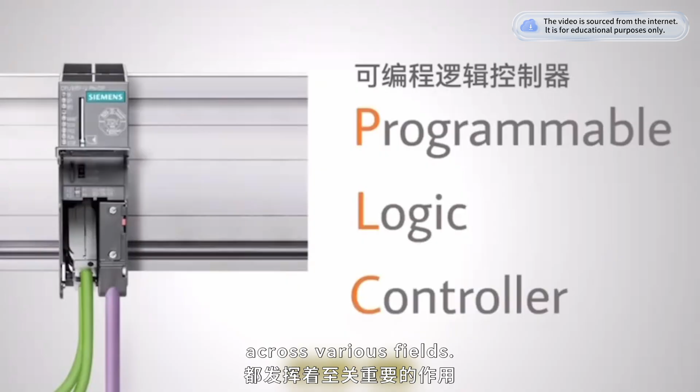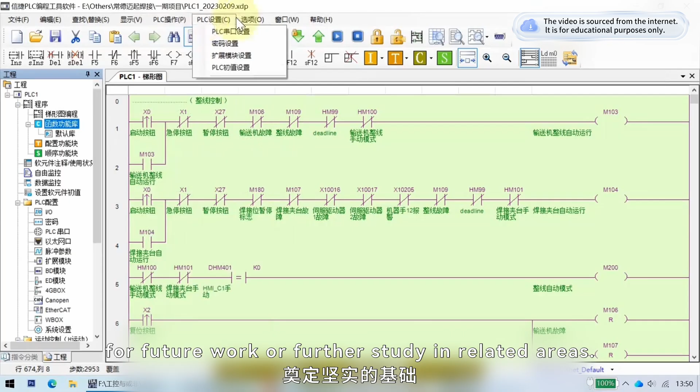With the development of industrial automation, PLCs have been playing a crucial role across various fields. The S7-200 Smart we are using is a powerful and widely applied programmable logic controller. By learning to program it, we can gain a better grasp of core industrial control technologies, laying a solid foundation for future work or further study in related areas.

We will explore this topic from the following parts. One, installation of PLC programming software.

To install the PLC programming software, we must first complete the hardware connection. A PC PPI cable is required to establish communication between the personal computer (PC) and the PLC. Connect one end of the cable to the PC's interface and the other end to the corresponding port on the PLC. Before installing the software, close all running applications on the computer, including the Microsoft Office toolbar, to prevent software conflicts or installation failure. Also, ensure that the communications cable between the PC and the CPU is properly connected.

Next, double-click the Step 7 Installation Program Setup.exe, and the system will automatically launch the installation wizard. Follow the wizard step by step to complete the software installation process. We can choose the default subdirectory as the installation path, or click the Browse button to select or create a new subdirectory in the pop-up dialog box based on our needs.

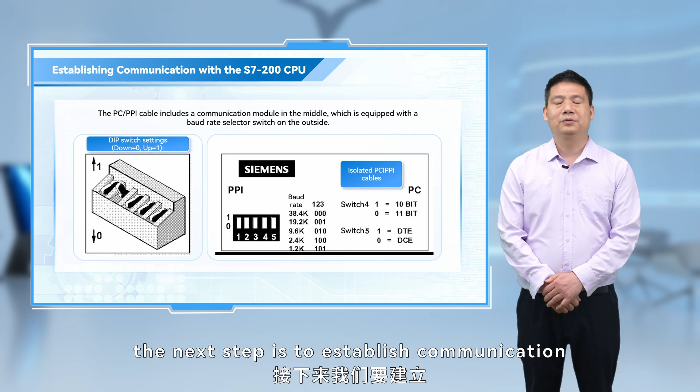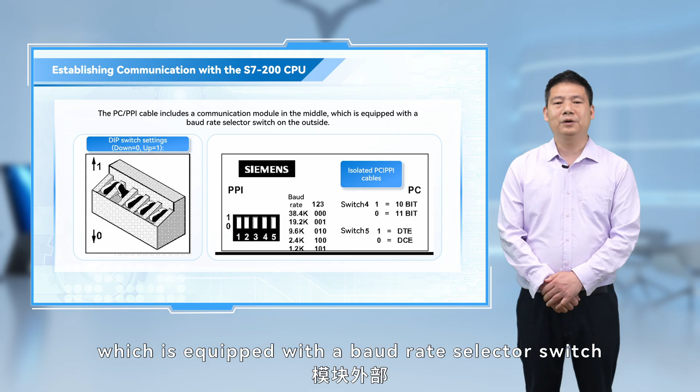After we install the software, the next step is to establish communication with the S7200 CPU. The PC PPI cable includes a communication module in the middle, which is equipped with a baud rate selector switch on the outside. This switch provides 5 PPI-compliant baud rate options: 1.2 kilobits, 2.4 kilobits, 9.6 kilobits, 19.2 kilobits, and 38.4 kilobits. The system default value is 9.6 kilobits per second.

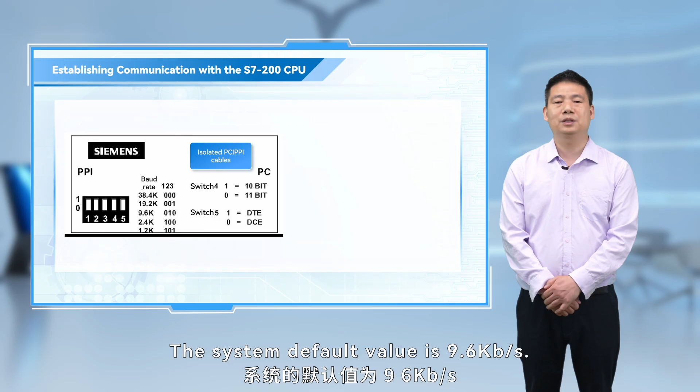The baud rate selector switch (DIP switch) on the PC PPI cable must match the communication baud rate configured in the software system. There are 5 switch positions on the DIP switch. Switches 1, 2, and 3 are used to set the baud rate, while switches 4 and 5 are for setting the communication mode. For the default communication speed of 9,600 bits per second, switches 1, 2, and 3 should be set to 010. If a modem is not being used, both switches 4 and 5 should be set to 0.

3. Components of the PLC programming software window.

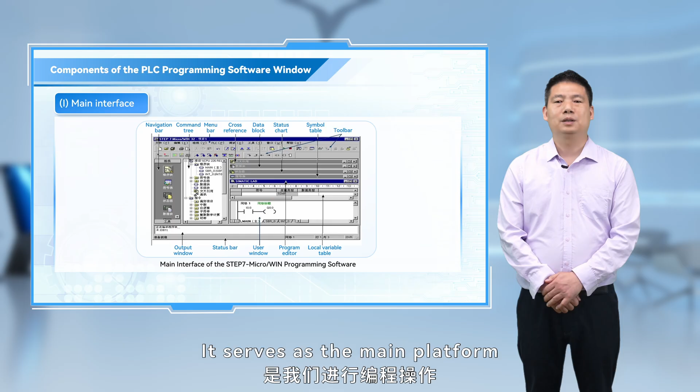Next, let's get familiar with the components of the PLC programming software window. First, the main interface: upon launching Step 7 Micro/WIN, the first thing we see is the main interface. This interface includes various menus, toolbars, and a workspace area. It serves as the main platform for programming operations.

2. Main menu. 1. File. This menu includes commands such as New, Open, Close, Save, Save As, Import, Export, Upload, Download, Page Setup, Print, Preview, and Exit.

2. Edit. The Edit menu contains options like Undo, Cut, Copy, Paste, Select All, Insert, Delete, Find and Replace, and Go To.

3. View. This menu allows us to customize the development environment of the programming software. For example, we can open or close auxiliary windows like the guide window and the command toolbar buttons to suit our preferences. It also allows us to perform all operations in the guide window, choose different program editors (LAD, STL, or FBD), and set editor styles such as fonts and command box sizes.

In addition, the symbol table view menu can be used to configure parameters such as data block, system block, status chart, cross-reference, and communications. We can also choose whether to display comments, network comments, the navigation bar, command tree, and output window.

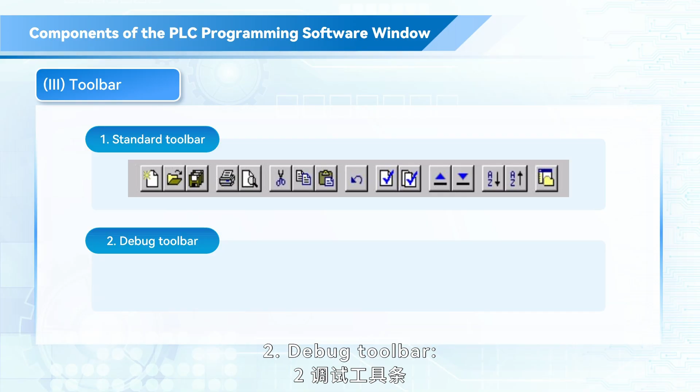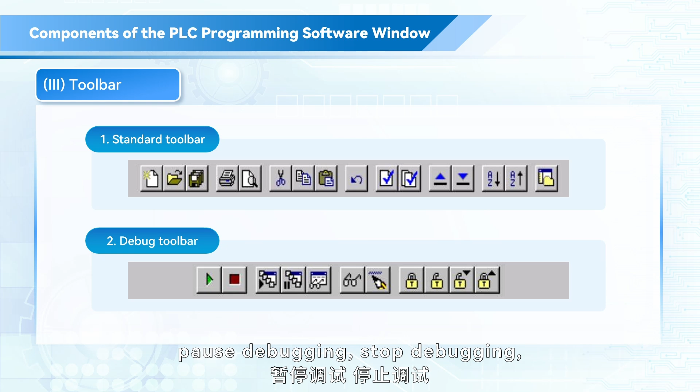Debug toolbar. The debug toolbar is specifically used during program debugging. It includes buttons such as Start Debugging, Pause Debugging, Stop Debugging, Step Execution, and View Variables.

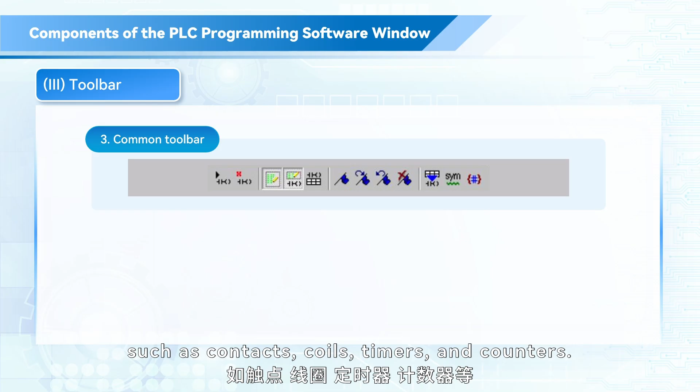Common toolbar. The Common toolbar provides access to frequently used programming tools and commands, such as contacts, coils, timers, and counters. LAD command toolbar.

LAD stands for Ladder Diagram Programming Language. The LAD command toolbar includes buttons for various ladder diagram commands, such as normally open contacts, normally closed contacts, coils, timers, counters, and comparison commands.

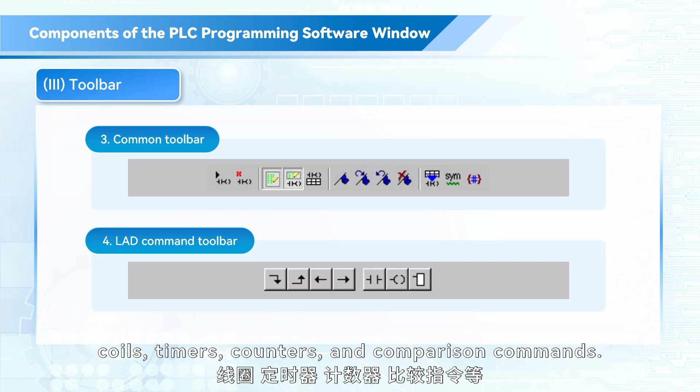Navigation bar. The navigation bar is an important tool that helps manage and navigate the project. It consists of the following main sections.

Program block. It consists of the executable program code and comments, including the main program OB1, optional subprograms SBR0, and interrupt routines INT0. We can create or modify the program block and write our own program code by using the New or Open commands from the File menu.

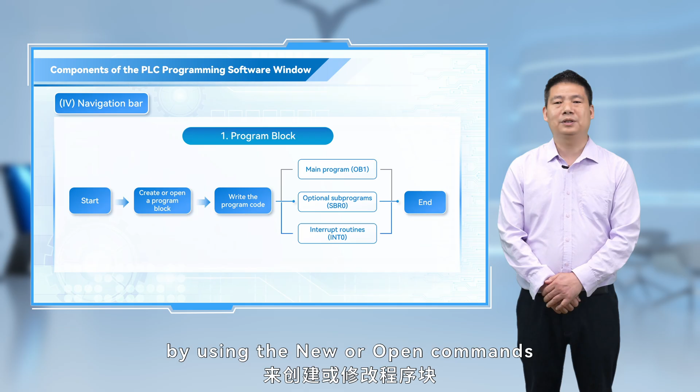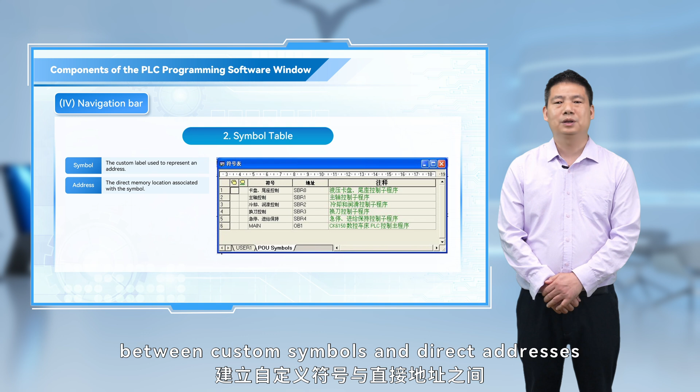Symbol table. It is a highly useful tool that allows us to use symbols in place of direct addresses for programming. By establishing a mapping between custom symbols and direct addresses in the symbol table, along with associated comments, we can use more meaningful symbols for programming elements.

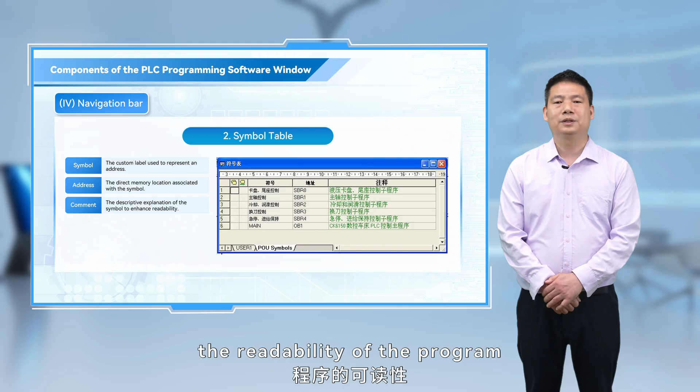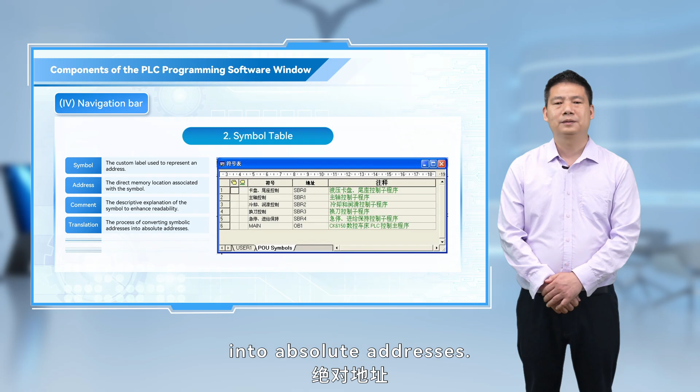This not only enhances the readability of the program and makes it easier to understand and maintain, but also ensures that once the program is compiled and downloaded to the programmable controller, all symbolic addresses are automatically converted into absolute addresses. The information in the symbol table will not be downloaded to the controller and does not occupy the controller's memory space.

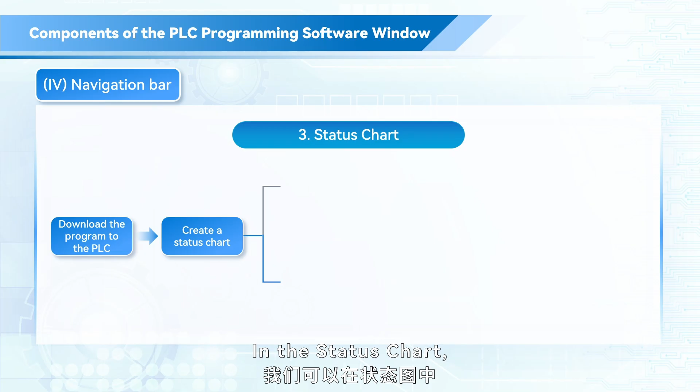Status chart. After downloading the program to the PLC, we can use the status chart to monitor the program's execution. In the status chart, we can add variable addresses and specify their data formats. This allows us to observe the real-time values and states of these variables during online debugging.

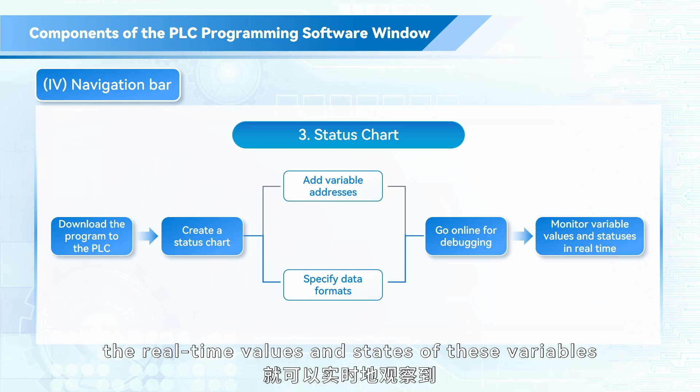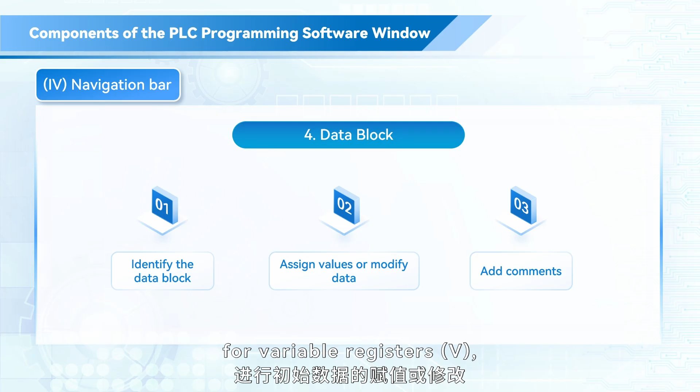Data block. It is mainly used to assign or modify initial values for variable registers, and we can also add explanatory comments as needed.

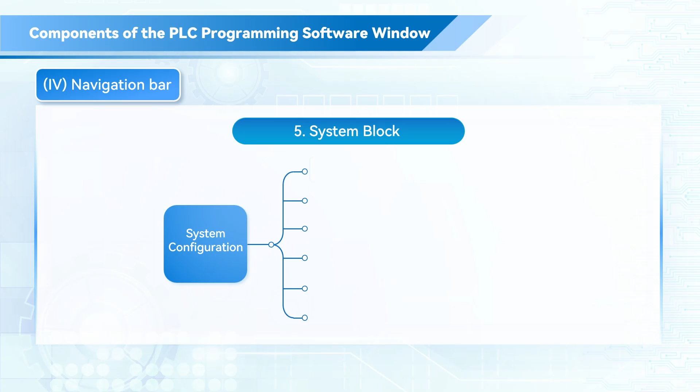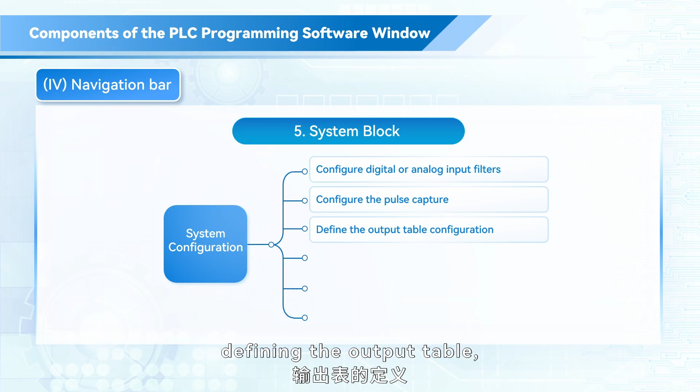System block. It is primarily used for system configuration. Here, we can perform a range of operations such as setting digital or analog input filters, configuring the pulse capture, defining the output table, setting memory retention ranges, configuring passwords, and adjusting the communications parameter.

Cross-reference. The cross-reference table lists the locations, POU, network, or line, of each operand used in the program, along with the command statements where these operands are referenced. With this table, we can clearly see how each operand is used within the program, including usage frequency and specific locations.

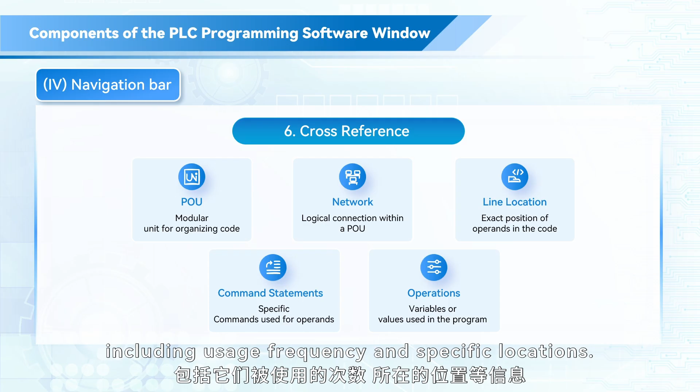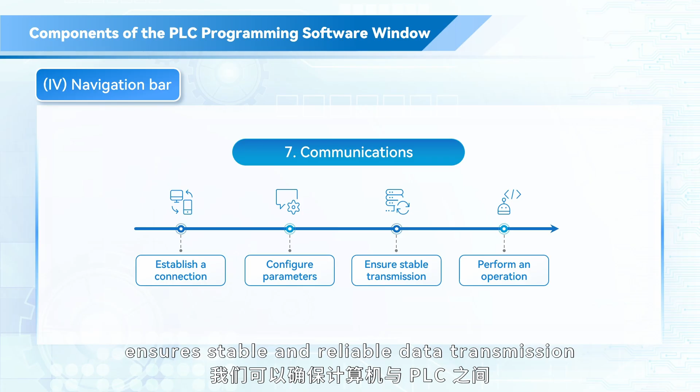Communications. This section is mainly used to establish the connection between the computer and the PLC, and to set or modify the communications parameter. This feature ensures stable and reliable data transmission between the computer and the PLC, enabling programming, debugging, and monitoring operations.

Summary. In today's lesson, we have gained a preliminary understanding of S7-200 SMART programming, including the installation of the programming software, communication setting, and basic operations of the programming interface.

I hope you will practice more after class to ensure you are familiar with the software, and try writing some simple programs to lay a solid foundation for your further learning. Lastly, please complete the exercises after class.